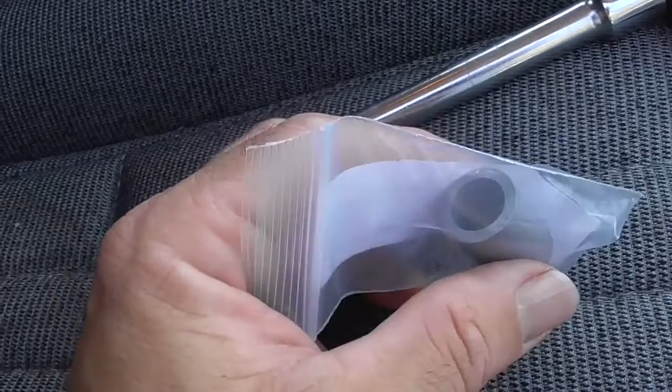You can buy a whole new striker plate for your hatchback for about $38 that comes with this washer, but you shouldn't need the whole striker plate or the striker bolt. You just need the bushing. You don't really need to watch me try to open and close my hatchback - it hasn't worked in probably 4 or 5 years. So I'm gonna open up the hatch right now and hopefully get this fixed on my own. If not, I've got the weekend to take it to my mechanic, or leave my hatch open for the rest of the car's existence.

So that's the part that's going to be put in there, and I'll go open the hatch now and see what happens. You're going to need probably a T50 Torx tool. Make sure it's a good one and not a piece of crap tool, because there's a lot of torque on these, and you're going to need a lot of force to loosen it and then tighten it up. A lot of these tools will break right off.

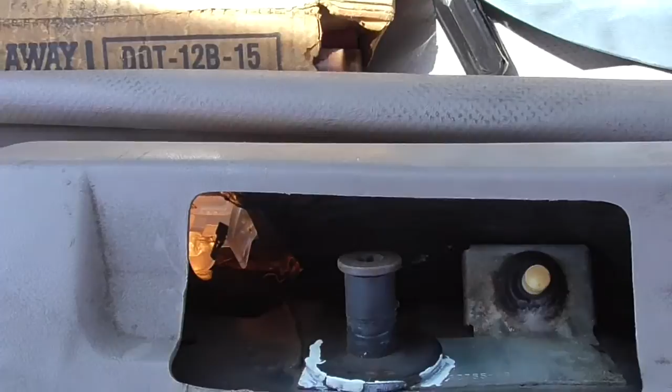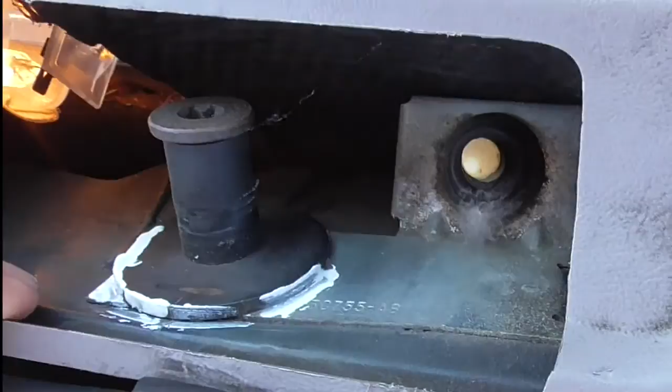Okay, this video is on the hatchback striker plate. I had to remove a screw over here and a screw over there so I could work with this thing. I might have to take off another panel inside so I can get the tool in there. I'll be putting the T50 Torx on there. I marked my striker plate with some white ink so hopefully I can get this thing lined up exactly the way it was and won't have alignment problems.

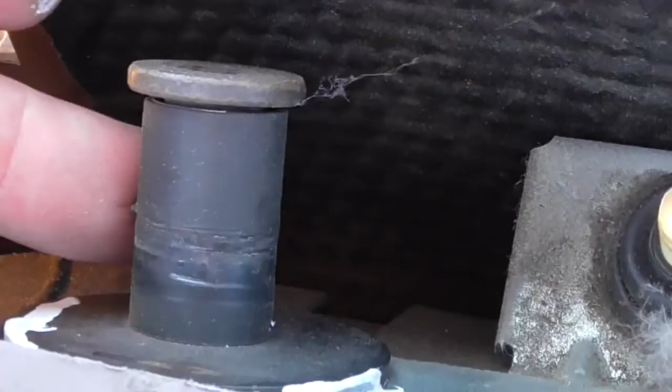So the next step is to put the T50 in there and unscrew this. It's not the greatest amount of light, but let me zoom in so you can see how worn out this thing is. That's why this car is not latching - you can see how this is completely worn out, scratched up. It's probably much smaller than it needs to be, so I'm going to put on the new part and see what happens.

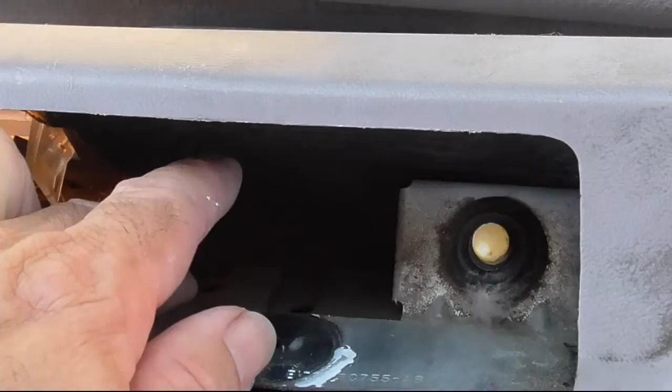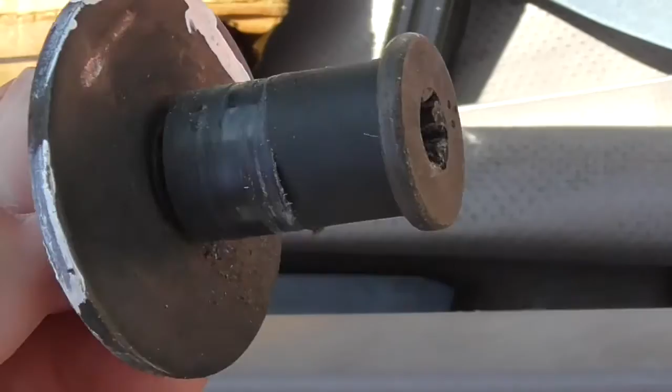Okay, you can see that I removed the striker plate and the bolt, and behind that is, I guess, the power switch that activates this thing - I don't know what the hell that switch is. There is the striker plate. Looks like I'm going to be unscrewing the bolt from the back plate. There might be a washer behind it, and then I'll put the new bushing on.

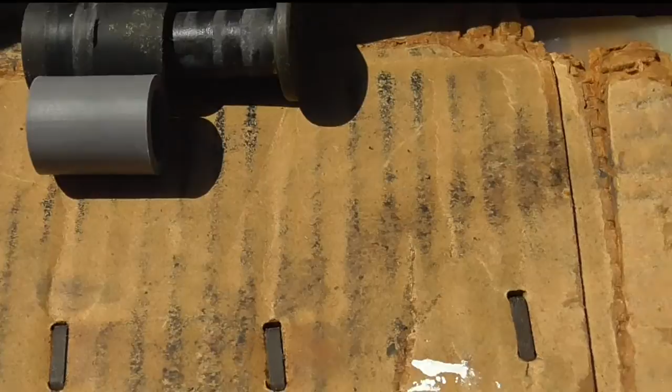Okay, the bushing's off, and you can see, as they said online, that it's a little bit shorter than the original, but it should work. I'll get you the exact dimensions of the one I'm taking off in case you want to make your own instead of buying this, and I'll post that on the video. So I'm going to put the new bushing on now, put this all back together, and screw it in and see if this hatch works for the first time in 5, 8, 10 years.

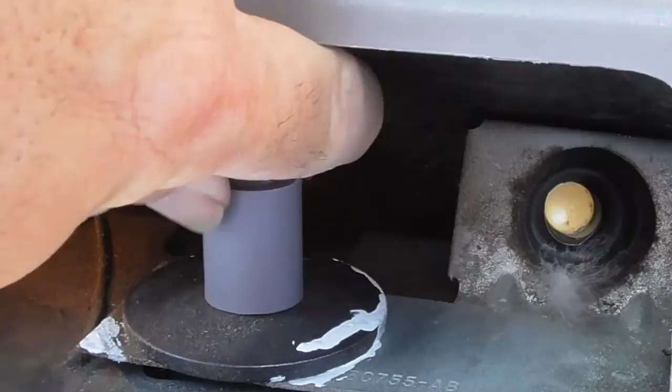Alright, you can see that I've got it in. I'm just tightening things down, and then I'm going to line up my little ink marks and scratch marks that I put on here for alignment purposes. Like I said, this thing is a little bit shorter than the original, but it's supposed to work. I will find out.

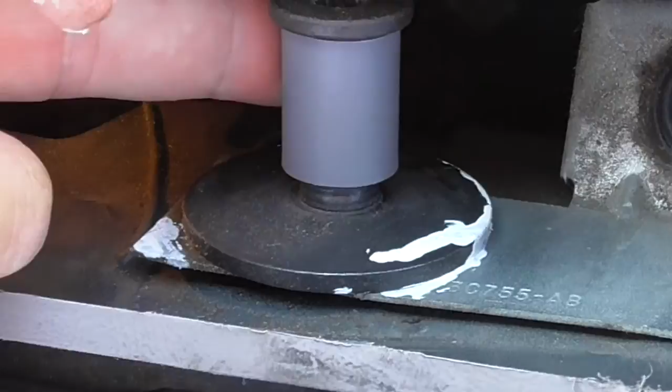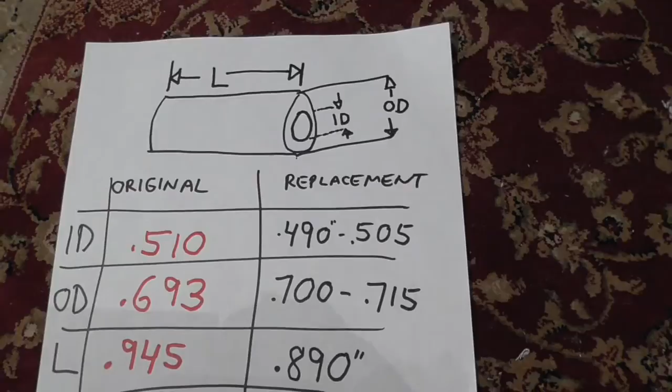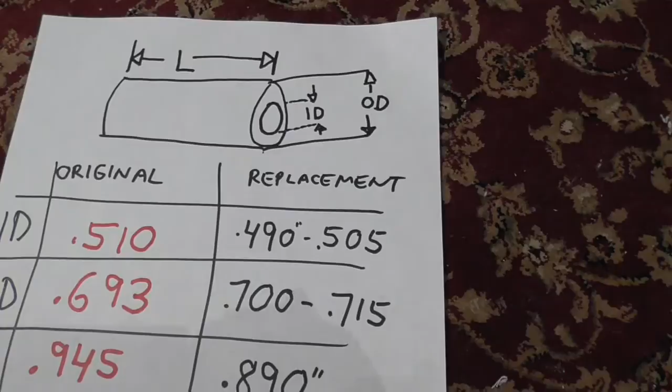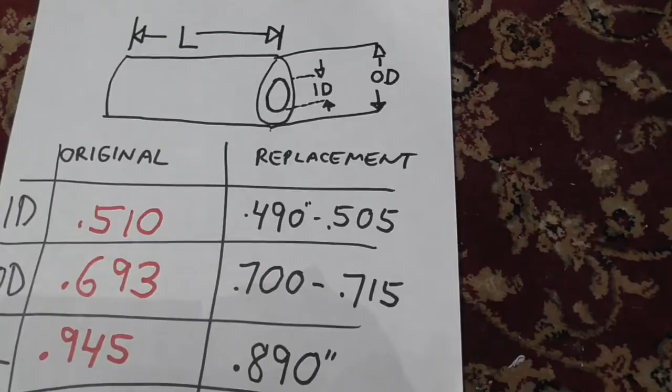Okay, final result of the hatchback. It wasn't extremely difficult to do, very simple to get out the striker. Once I put on the bushing, I couldn't get the door to latch - it would not latch at all. I wasn't sure if the latch was broken or if the striker wasn't positioned properly. Luckily, I was able to drive over to my auto mechanic, and he did the exact same thing I did. He tightened the screw and it closed right away. So maybe I was just in a rush. I was worried I was going to have a broken hatch for the whole night. So do this early in the day so you don't have to worry about leaving your vehicle unattended and unlocked or opened.

These are the dimensions of the bushing. This is the length, you know, how long the whole thing is.

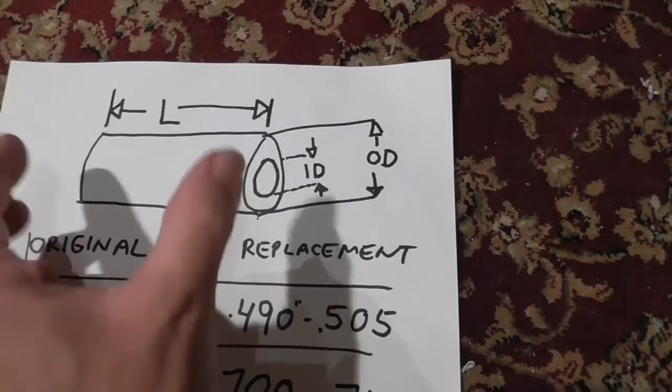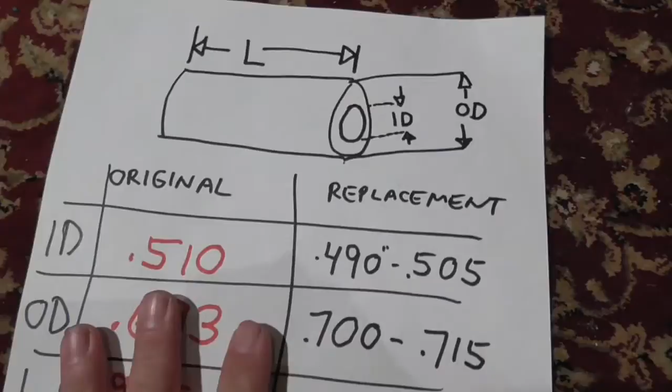That is the outside diameter of the bushing, and then the opening, that's the inside diameter. The original inside diameter was 0.510.

The replacement varied from 0.490 to 0.505 inches. So make sure you find a 1/2 inch piece of material, inside diameter, if you're going to do this yourself. It's kind of ridiculous to spend $4 per bushing. It's not my money, but if I can help you save some bucks, good for me, good for you. Outside diameter was 0.693 on the original, 0.700 to 0.715 on the replacement.

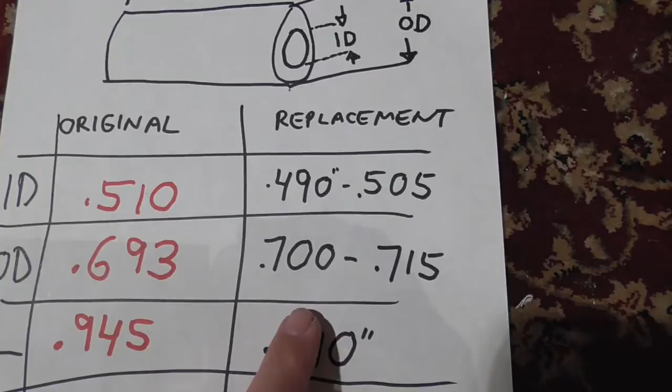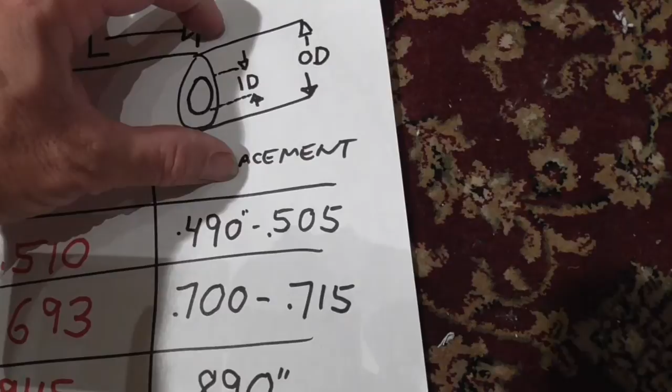That's pretty important too, because if the outside diameter is too thick, this thing's not going to fit into the opening on the latch, or on either the door or the hatchback. So you need to make sure this round thing is not too wide on the outer dimension. Both of these things are fairly important.

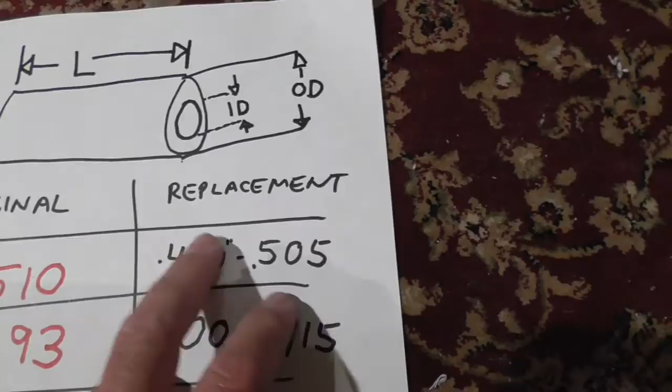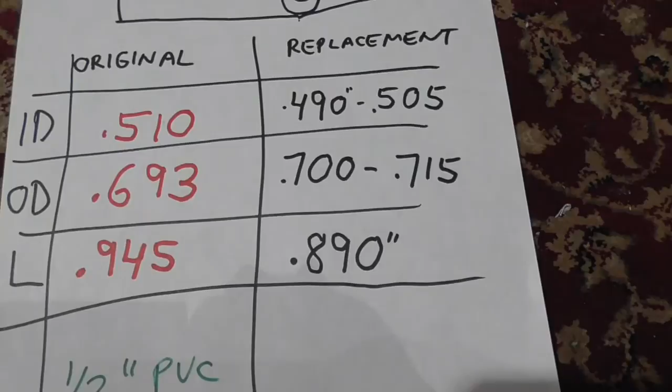You look over here, that's way too big. I mean, that's like 0.15 bigger, like a 1/10 of an inch bigger, rounder, and there's no way the bushing is going to fit inside the latch so the door closes.

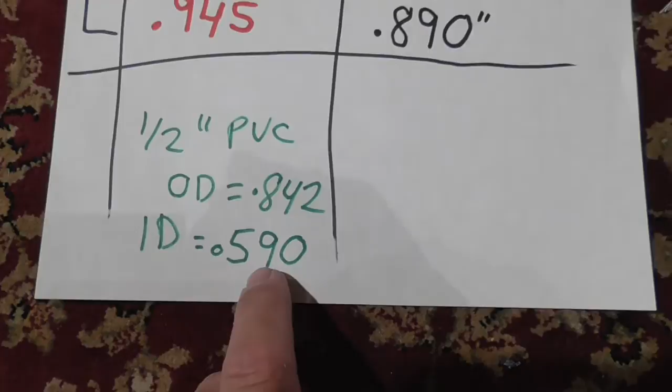Inside diameter on the PVC was 0.590. Inside diameter should be 0.5, so that was almost a 1/10 of an inch of slop that the bushing was flopping around on the striker bolt.

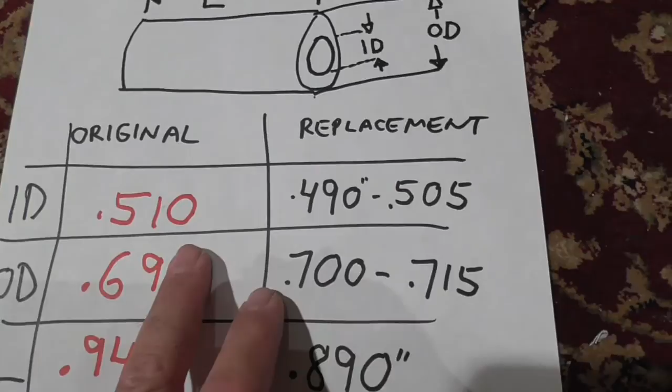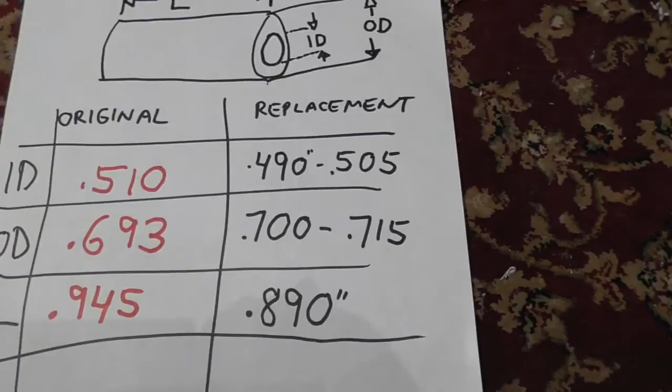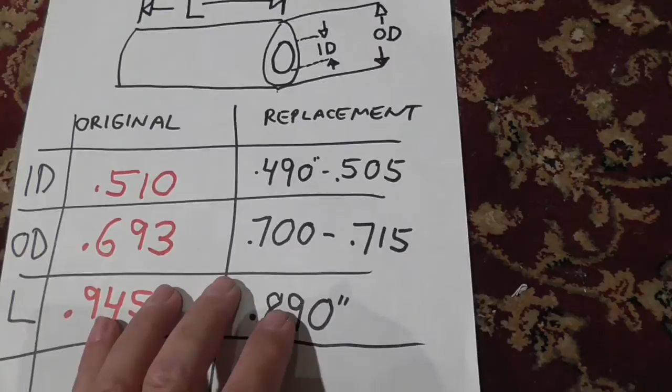That's why if you think you're going to buy a 1/2 inch PVC pipe and do this on your own, you were wrong. You're going to have to find some other pipe with these dimensions of 1/2 inch. Very critical, that 1/2 inch on the inside diameter, because you can't have this thing flopping around. There's just no way.

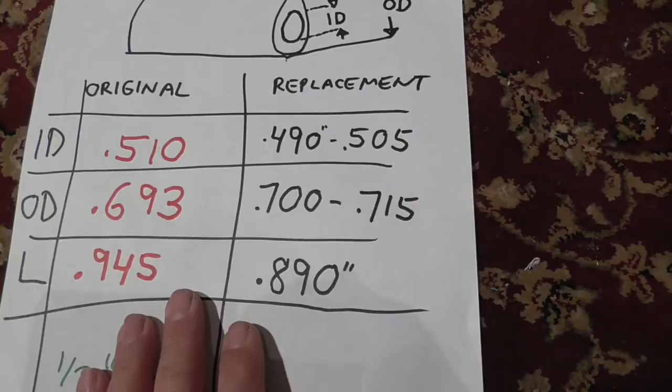And length was 0.890, and the original was 0.945. That's on the door. Now, if you saw my video, the striker bushing needs to be a little bit longer on the hatchback.

It doesn't need to be. I mean, it works. The thing works perfectly because the latch doesn't even hit the striker at the part where it's not covered.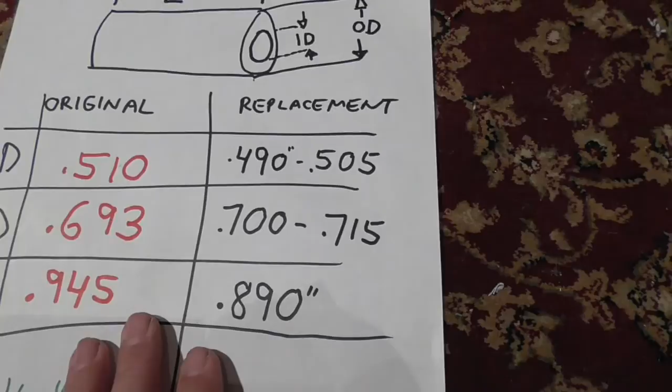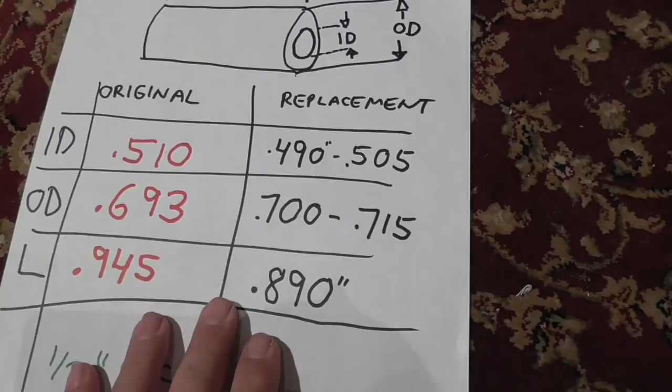So you can use the things you can buy on the internet for $3.99 if you want to, or make your own, or make it a little bit bigger. I would give you the length of that, except the bushing's sitting in my car.

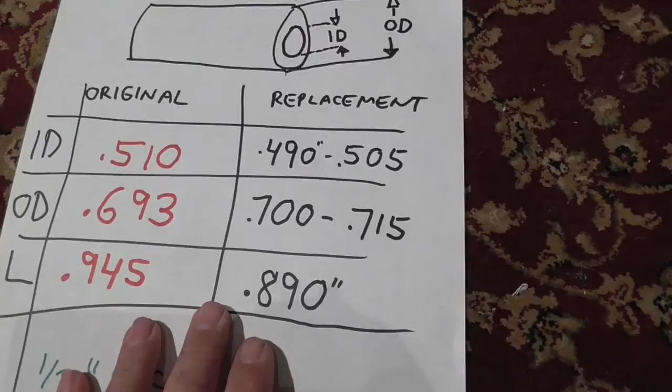I don't want to unlock it tonight just in case it doesn't want to latch. I don't want to leave it parked unattended with it not locked, and I don't want to slam that thing anymore. But it looked like it worked today.

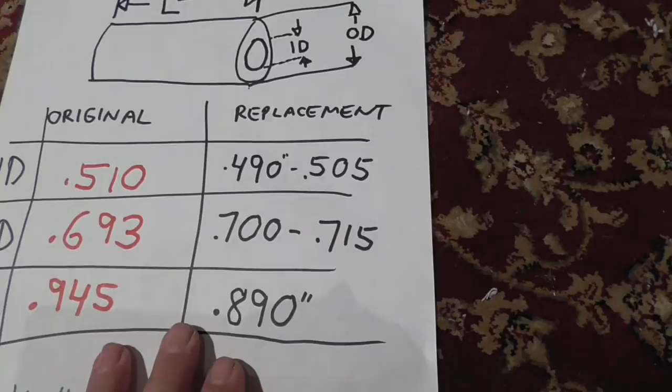I closed it 4 times with the mechanic and everything worked fine. And no, he didn't charge me because he realized it was lame - I had the tool, he just went over there and tightened it again and everything worked. So I was just in a rush to make sure it worked.

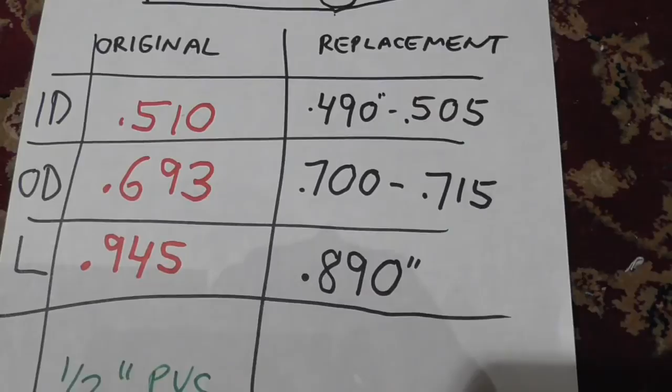Hopefully you enjoyed the video. I'm going to put this on both the video for the hatchback replacement bushing and the door replacement bushing, so you'll get this info for both of those. This does work. It will make it easier to close your doors and your hatchback.

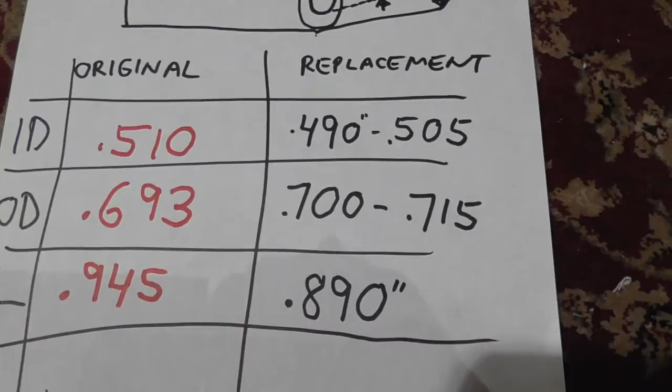Alignment is a pain in the ass. Don't think that it isn't. You might be lucky, but I had to adjust all 3 of these strikers, the striker plate, so that it closed properly. I kept on slamming the door shut until finally I had everything positioned right.

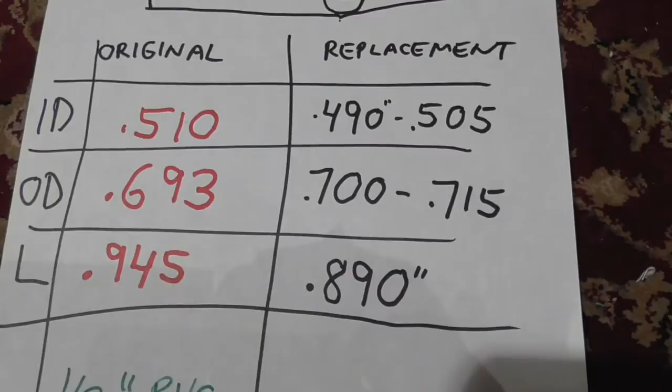Good luck, this is an easy thing to do. The replacement will take you less than about 2 to 3 minutes at the most, and the alignment hopefully will not take you a long time.

Alignment on my door probably took 10 minutes on the first one. Once I figured out how to line things up a little better, even though I had everything marked, once I figured out how to line things up...

Alignment on the second door was probably 2 minutes, and then I messed with it a little bit till I got it to latch better. And it still doesn't latch 100%.

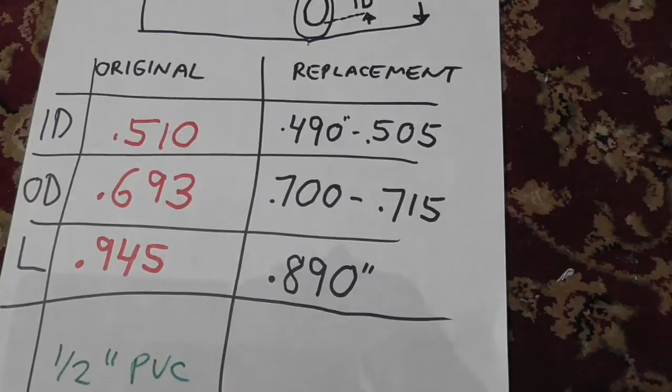A couple times today I've closed the door and I needed more force than usual, and then it closes perfectly. And it looks really good. It closes the way it should be, but it's not an easy just touch that door and it closes.

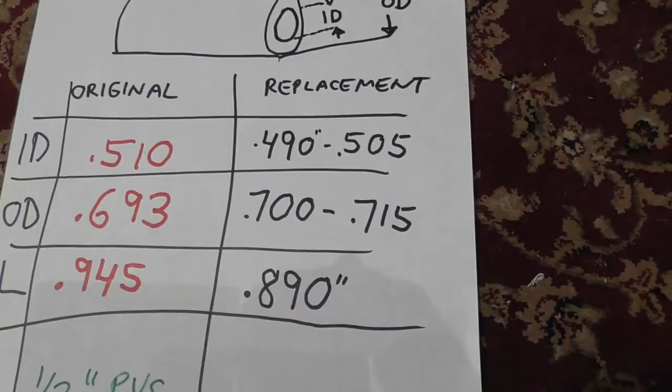What else? Of course, it also doesn't have some grease or lubricant on there, and it's just a new bushing. I probably don't have the thing 100% lined up the way it should be, but it's working and I'm happy. As far as the hatch, like I told you, that was very difficult to do.

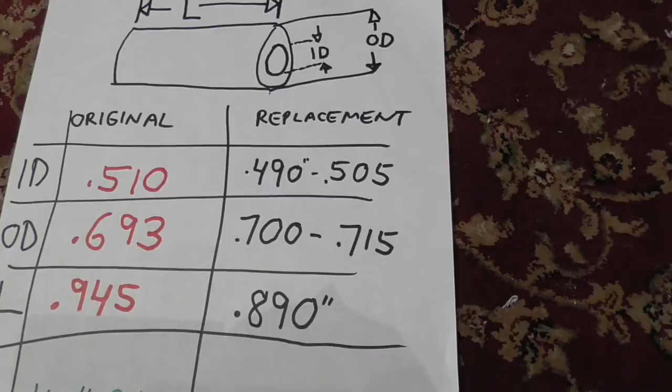I saw a video on here where the guy pops a little piece of tubing on there and shuts his door and everything works fine. That is not going to happen. It's just not going to happen. It's not going to align that easily.

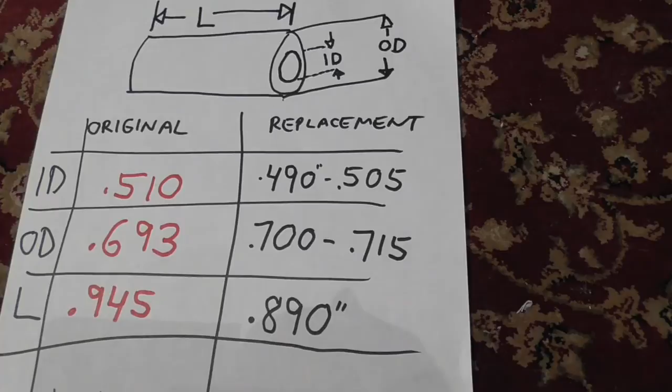But you can do this, and you will be happy once you do. So buy the parts, make your own bushing, whatever you want to do, and hopefully this video helped.